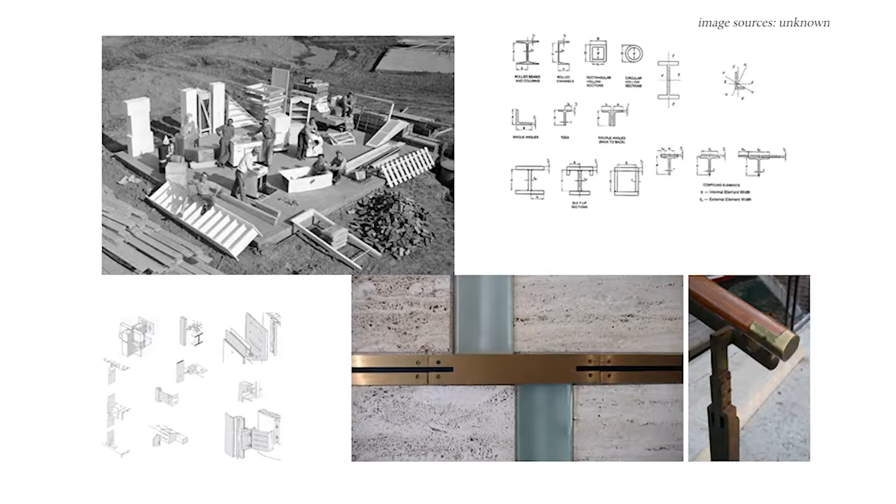The prospect of architecture that couples organic and artificial life presents a number of challenges to orthodox approaches of architectural design and construction. Living architecture challenges the idea that we can make complete determinations in advance. It challenges the idea that we can operate with a pre-specified inventory of materials and parts with known performance. It also challenges the notion that as architects we design endpoints that we consider to be completed once construction has terminated.

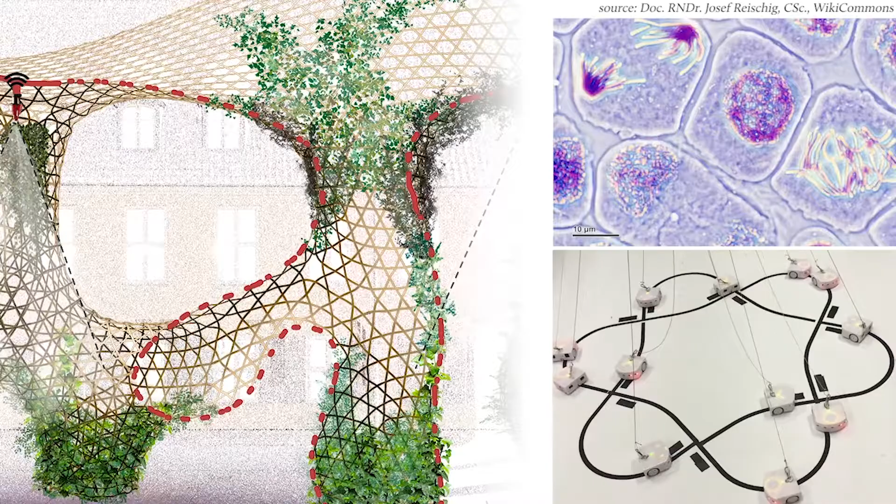And it also presents a challenge in the translation of high-level architectural objectives and intentions into low-level instructions for self-organizing systems, and also the degree to which we allow emergence of those low-level systems to feed back up the chain of design intent.

Our first approach in the project is to steer plant tropisms using environmental stimuli. Our predominant focus is on phototropism. We have artificially evolved robotic controllers to direct growth paths to specified target points with near 100% accuracy.

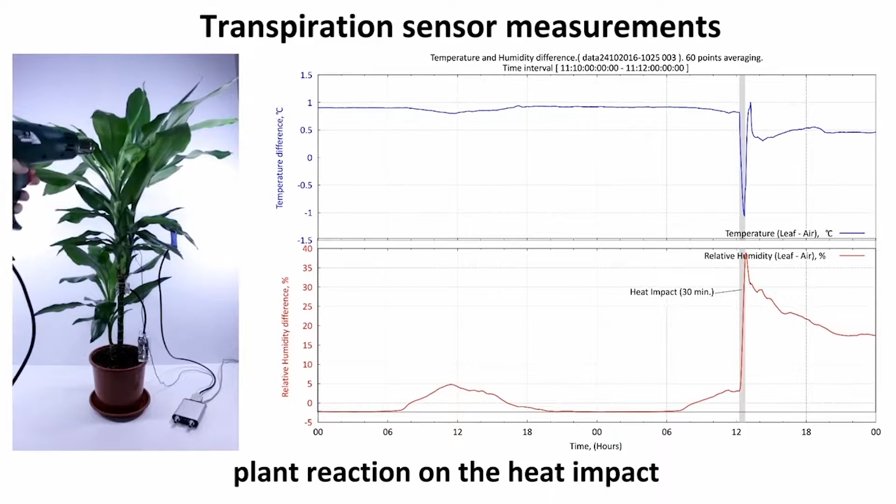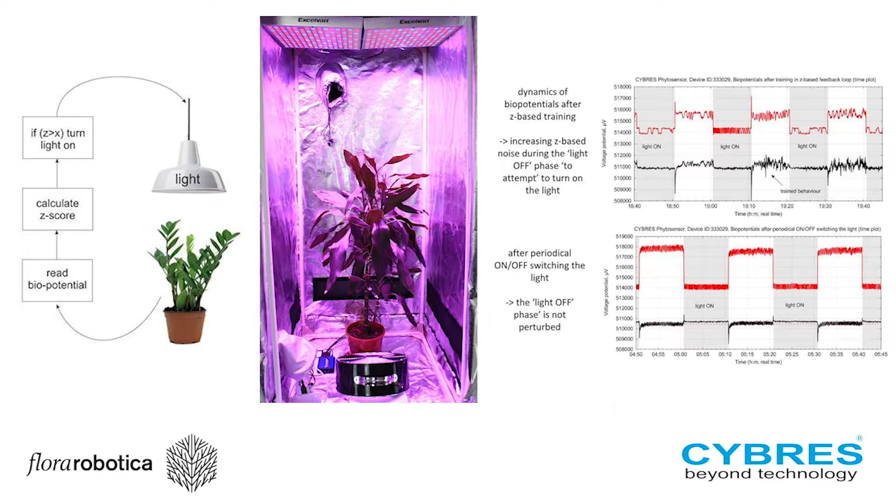An additional approach is to directly sense the plants. Sensing channels include transpiration, sap flow, and electrophysiology that allows environmental impacts to be read in real time. This opens the possibility of creating closed-loop systems, where a plant can be trained through feedback, in this case to turn a light source on and off at will.

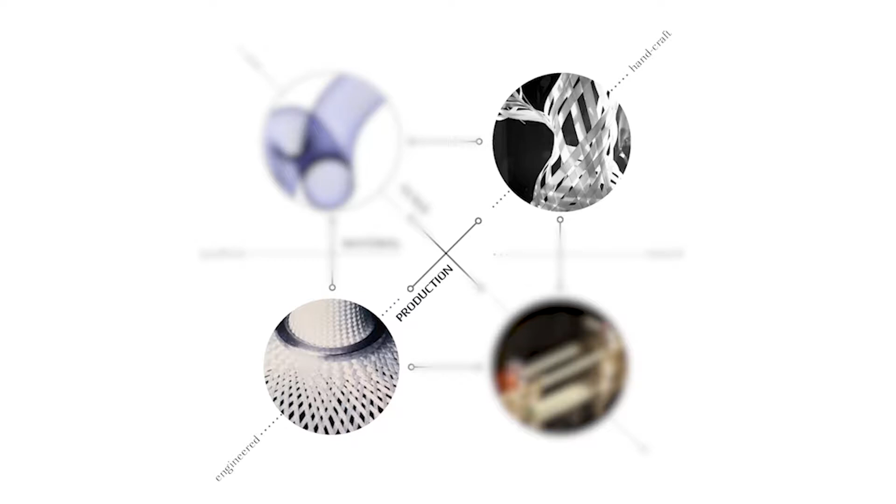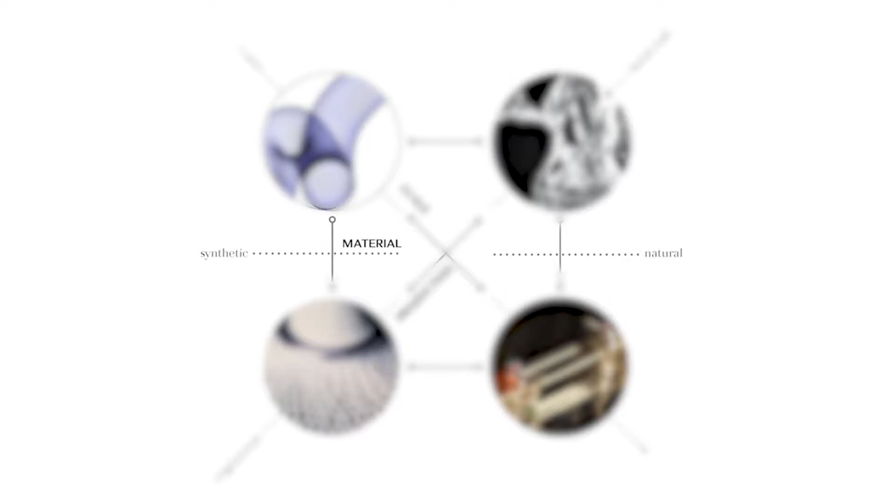The further approach is to use scaffolds as supports for both plants and robots, with the additional architectural benefit of being able to mark out an organized space. We focus on braid and related interlacing systems, which allow engagement across engineering or handcraft production. They allow for the spanning of vast length scales, and they're materially agnostic, allowing production with synthetic, natural, or mixtures of material. This makes these interlacing systems highly versatile and opens up a rich design space.

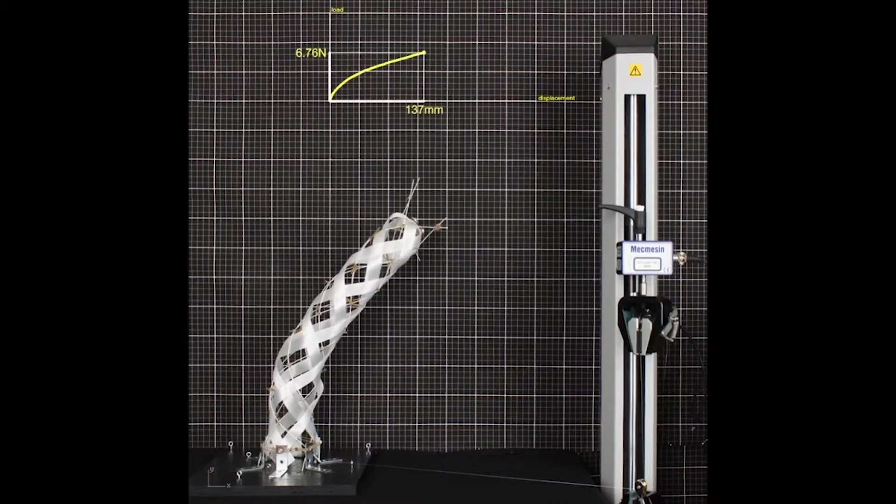We've been exploring how these systems can be actuated, how they can be materially graded to achieve specific performance, and how they can be controlled in efficient ways that exploit principles of continuum bodies for new forms of robotics. Through handcraft, we've developed tacit understandings of how to achieve complex topologies and morphologies in braids.

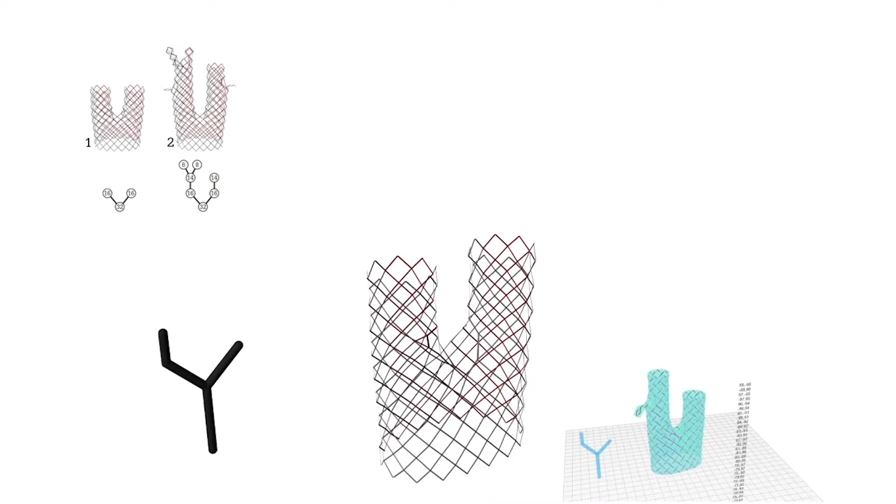And, of course, as architects, we've sought to formalize these understandings in principled ways so that we can explore these systems and their adaptive potentials through representation. This includes simulation-based methods that feed into understandings of how to specify mechanical performance and also material differentiation.

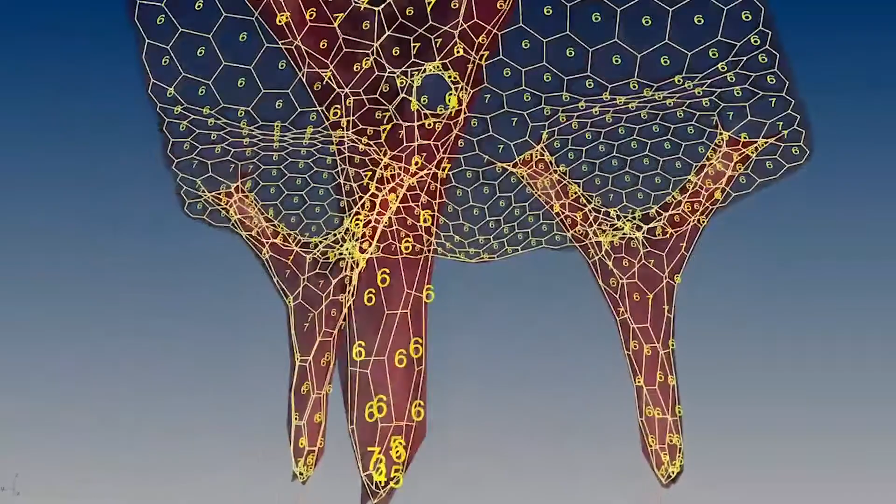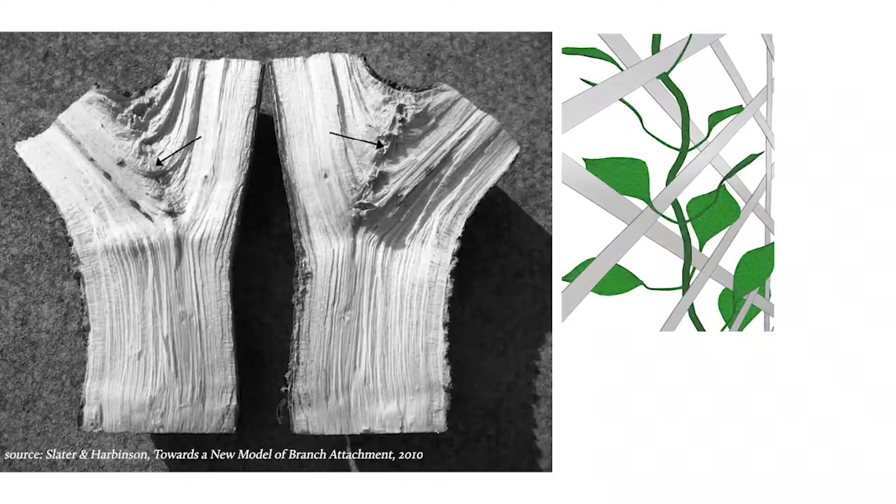The underlying computational methods breed new aesthetic opportunities, allowing us to explore a spectrum from the wild and the self-organized to the cultivated and the predetermined. Within this aesthetic range, we're mindful that plants can contribute to underlying performance capacities by treating them as future stiffening filaments once they've been directed into place and matured.

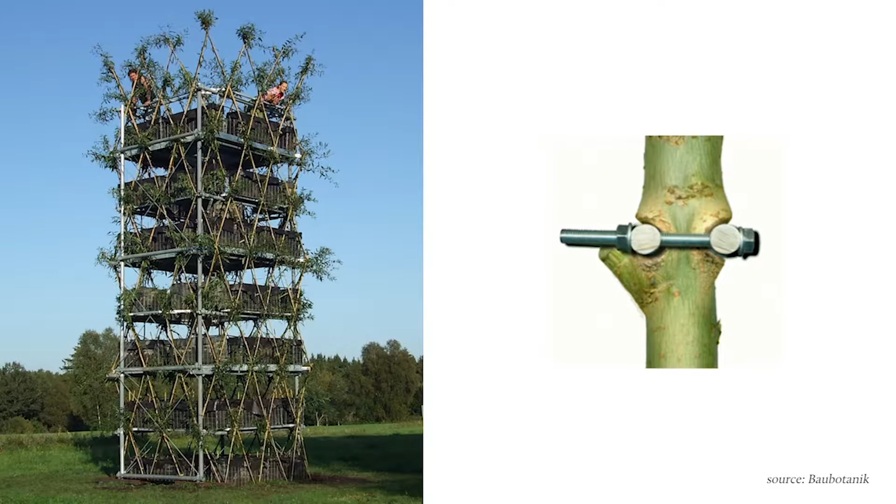So how does this work extend the prior art? Well, in contrast to manual approaches of directed plant growth to achieve architectural structures, we're contributing insights into autonomous control methods. Where scaffolds have been deployed to train growth, as in the case of Mitchell Joachim's tree Fab Tree Hab, or these scaffolds becoming incorporated by growth, as in the case of Baubotanik, we're expanding the scope of scaffolds by giving them agency and potentials to morphologically adapt over time through artificial growth.

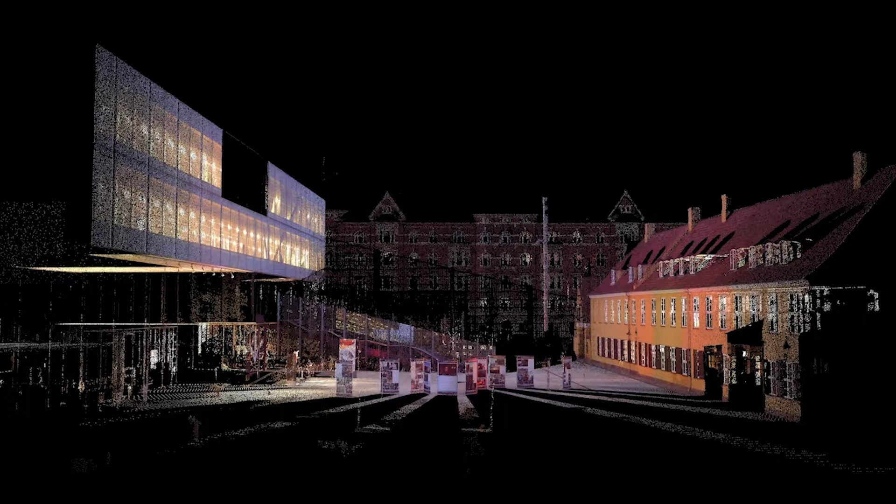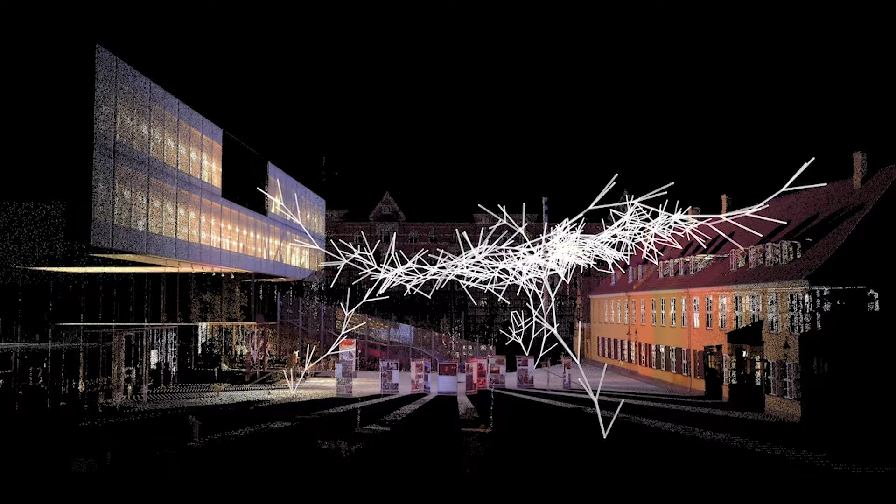So how does this come together in terms of architectural proposition? This is very much work in progress and is more focused on establishing workflows. But as an example, here's a site that we analysed to determine a plane in space with light conditions suitable for a target climbing species. We artificially grow a wild supporting structure underneath this intended canopy, and we skin it with an interlaced weave, which is then further analysed.

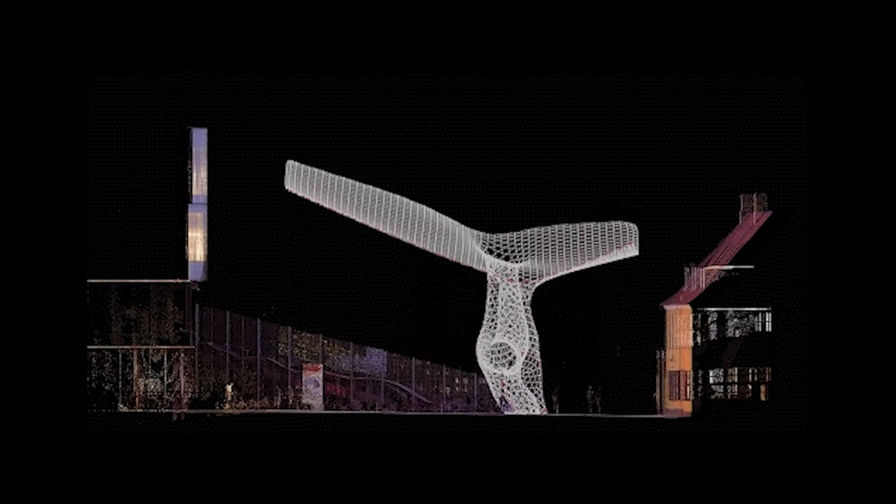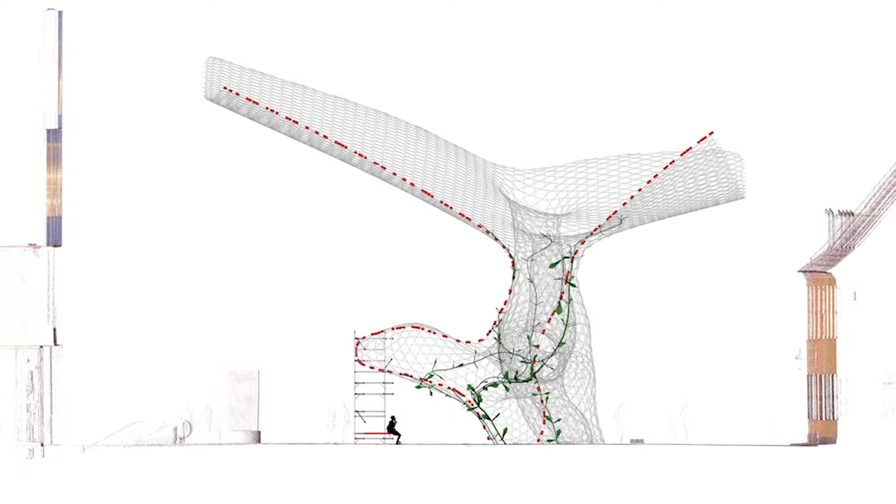It's analysed in terms of its structural performance and the light affordances that it gives to be able to determine ideal growth paths, which are then simulated to explore the dynamics of the structure and the architectural opportunities that occur over this growth career. We're also speculating on an artificial version of the Wood Wide Web, where surrounding species marooned within oceans of hard landscape can act as organic management systems of artificial stimuli located on the structure.